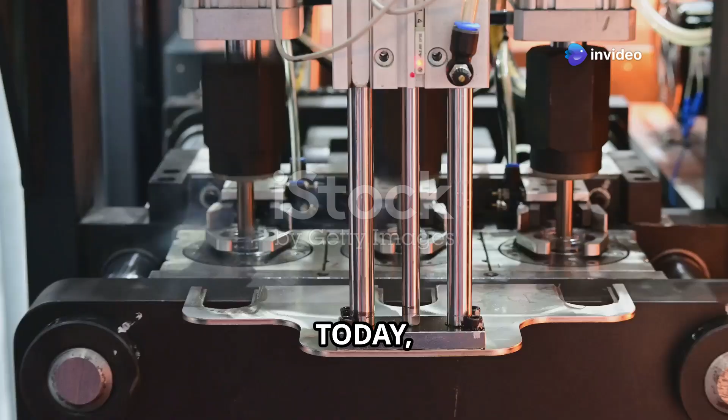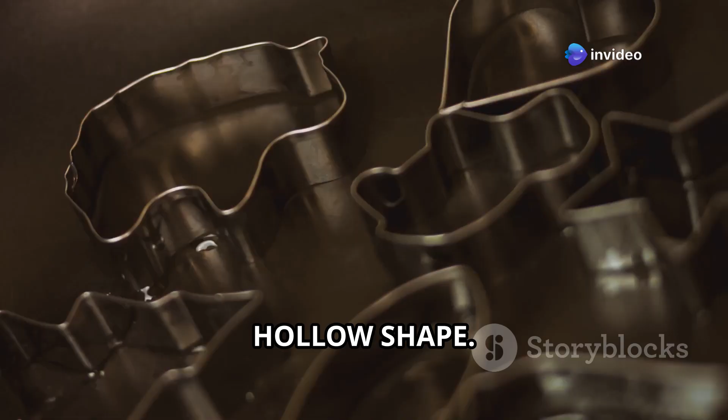So what is a plastic mold? Think of it like a very strong, hollow shape, like a cookie cutter but much stronger. Hot, melted plastic goes inside, cools down and ta-da, a new plastic thing is born.

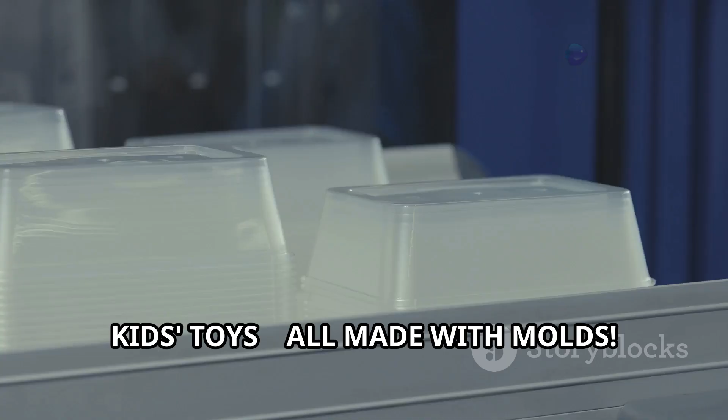Look around you. Your phone case, water bottle, kids' toys, all made with molds. Without molds, life would be different. They help make things fast and cheap. In this chat, we will learn all about them.

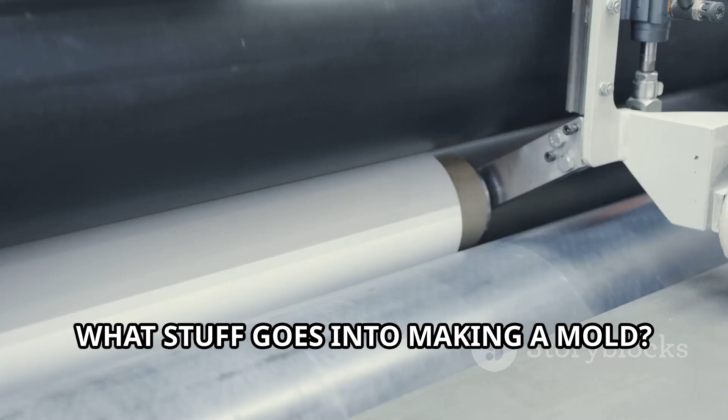How are these amazing molds made? What stuff goes into making a mold? It's a whole big process. From the first idea to the final part, we will see every single step. So grab your popcorn, sit back, and let's dive into the world of molds. It's going to be a fantastic show.

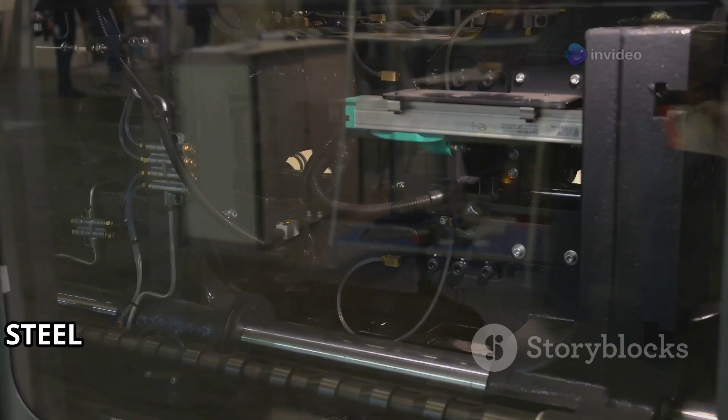Now Doston, what are molds made of? They need to be super strong to face hot plastic and lots of pressure. The most common hero is steel. Steel can take a lot of heat and high pressure, making millions of parts. It's like the Salman Khan of mold materials, always reliable and super strong.

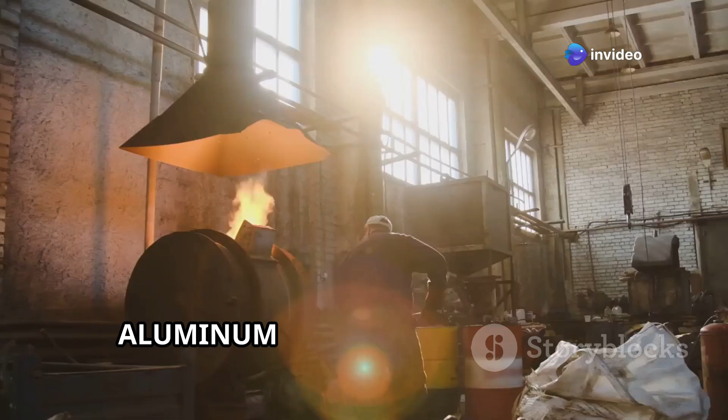But wait, there's another star. It's aluminum. Aluminum is lighter than steel, making the mold easier to handle and cool down faster. However, aluminum molds don't last as long and are good for fewer parts or trying out new designs.

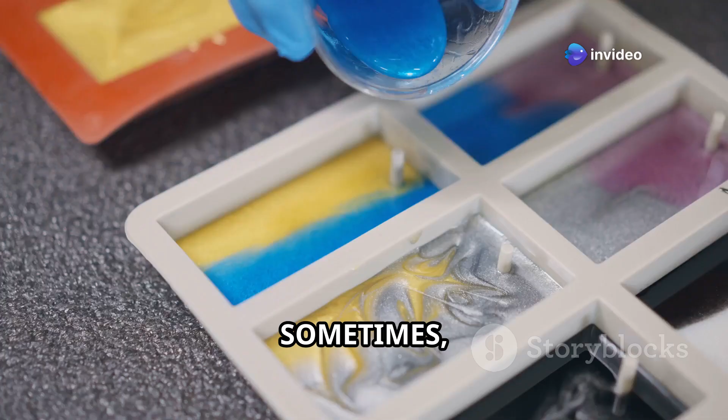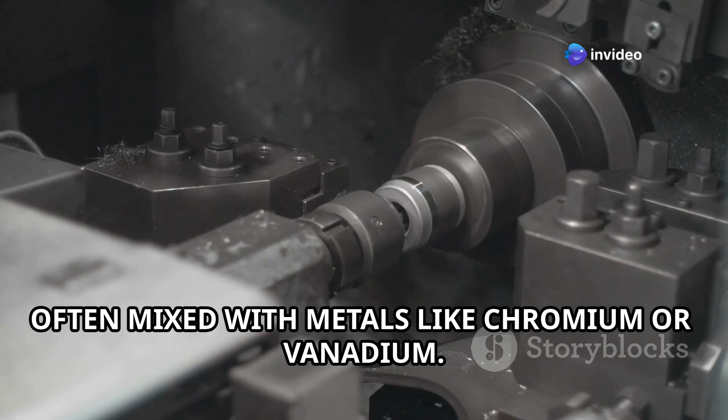Sometimes special materials are needed for tricky or tiny parts, or when the plastic is very aggressive. Engineers use special tool steels, even tougher than normal steel, often mixed with metals like chromium or vanadium. This makes them extra hard and resistant to wear and tear. Choosing the right material is super important.

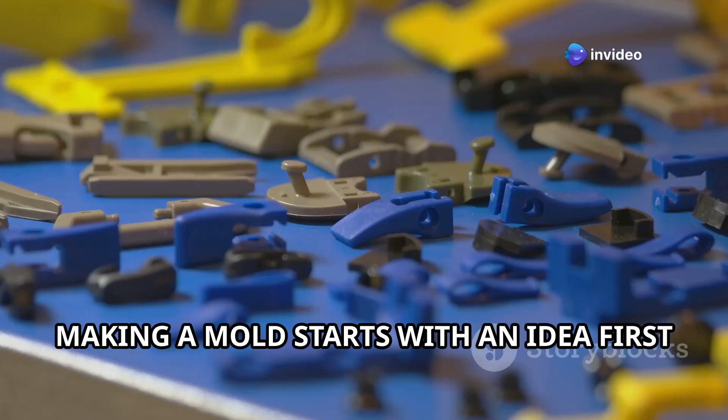Okay Doston, before we build anything, we need a plan, a super design. Making a mold starts with an idea. First, what plastic part do we want? The design of the part is step one.

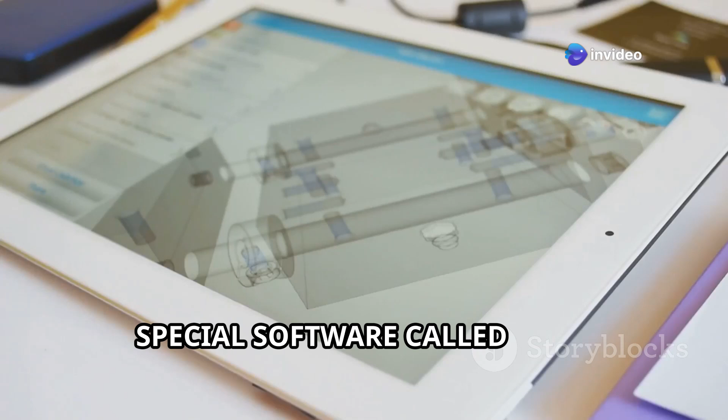Engineers think about every curve and detail. This is the blueprint for our mold. Then computers come to the rescue. Special software called CAD, computer-aided design. Engineers draw the mold on the computer like a three-dimensional digital drawing. They can see it from all angles and check all the measurements.

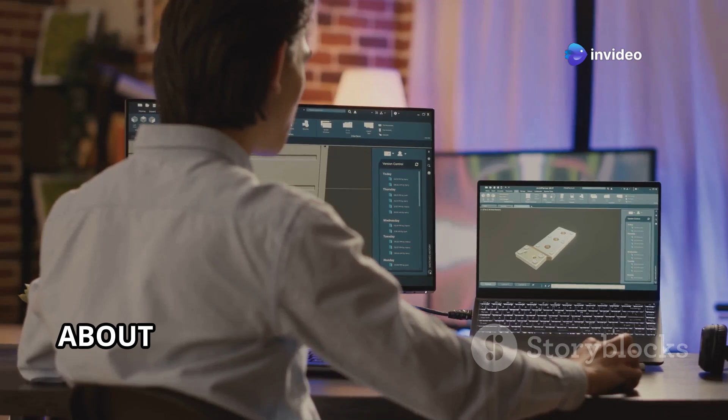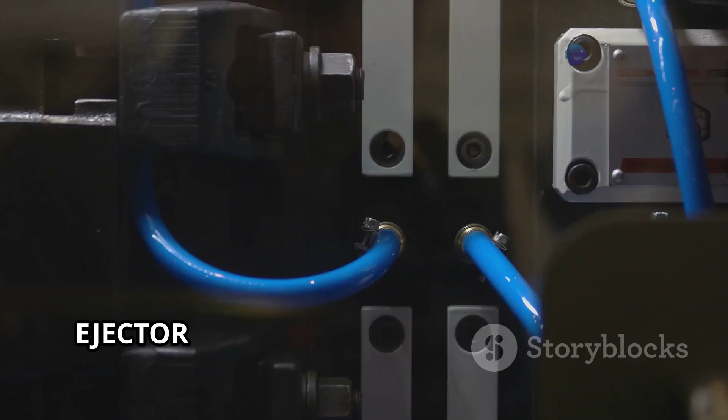The designers also think about how the hot plastic will flow in, called the runner, and the entry point, the gate. They also need cooling channels for water to flow through and cool the mold. And what about getting the part out? Ejector pins push the part out gently.

Precision is the name of the game, Doston. Every tiny detail in the design matters. If the design is even a little bit off, the final plastic part will be wrong. Designers check and double-check everything. The design is the treasure map, leading to a perfect plastic part.

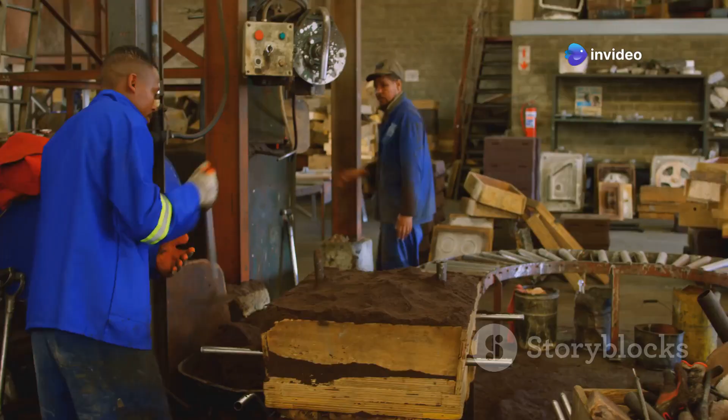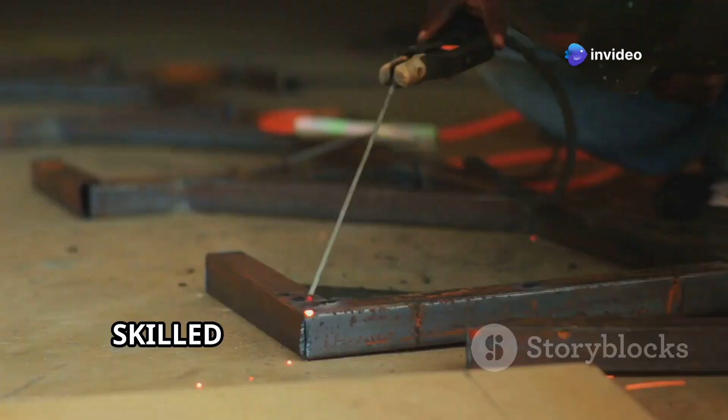Section 4: Building the mold. Real workshop magic. The design is ready. Now it's time for some action. We take the computer design to the workshop. Skilled toolmakers get to work, turning blocks of metal into molds.

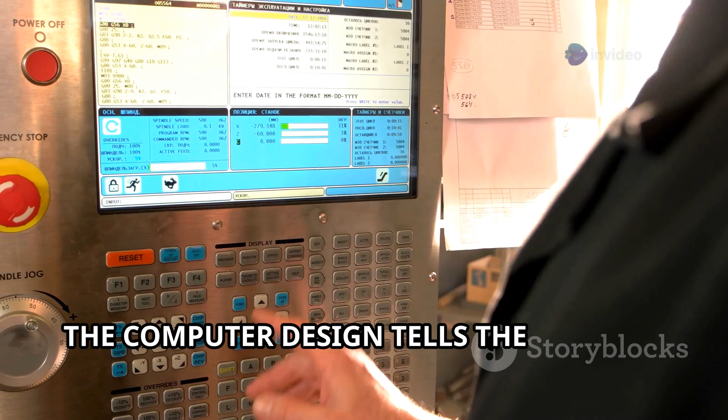First up, big machines called CNC machines. CNC means computer numerical control. The computer design tells the machine what to do. The machine has sharp cutting tools. It carefully cuts away metal from the block. Bit by bit, the shape of the mold appears. This process is very accurate, making sure the mold is just right.

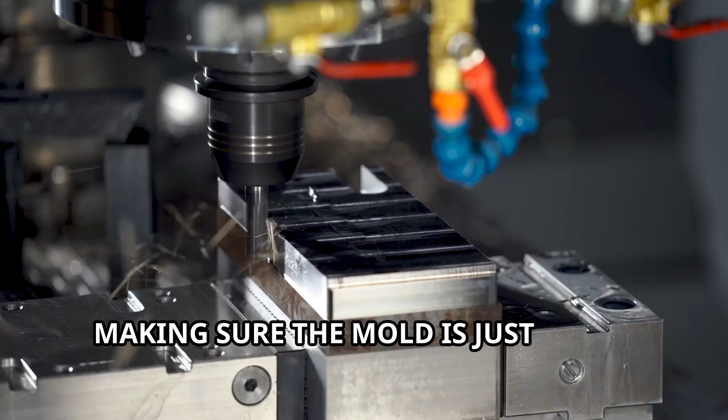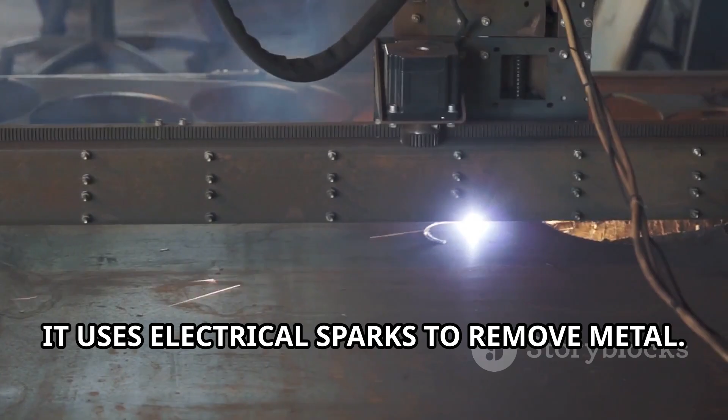Sometimes for very fine details or hard-to-reach areas, another cool process is used. It's called EDM, electrical discharge machining. It uses electrical sparks to remove metal. An electrode, shaped like the detail needed, is used.

The sparks jump from the electrode to the metal. Slowly, they erode the metal away, creating tiny, perfect shapes.

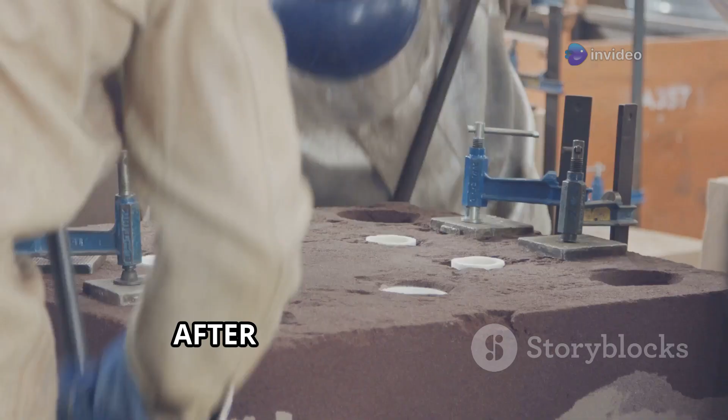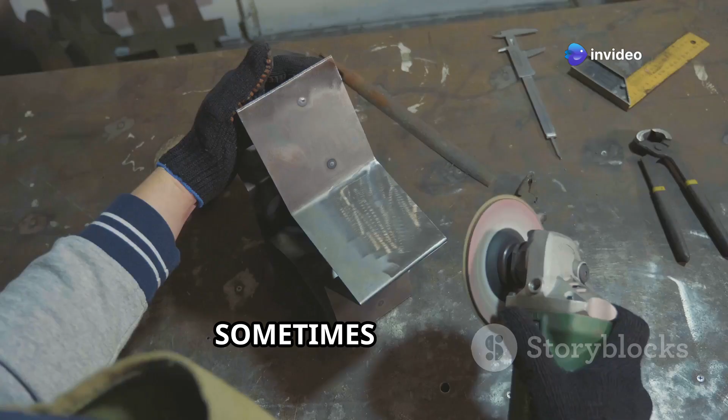After all the machining comes finishing. The mold surfaces need to be super smooth. If the mold is rough, the plastic part will be rough. So toolmakers polish the mold, sometimes by hand, with great care. They use special tools and pastes until it shines like a mirror. This ensures the plastic parts look great and come out of the mold easily.

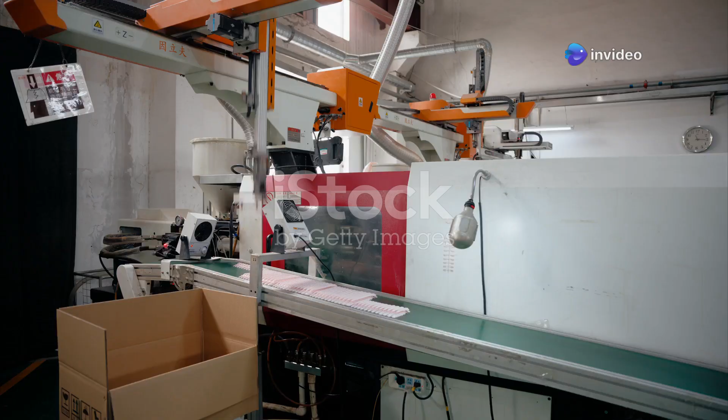Section 5. Poof, making plastic things. The molding magic show. Doston, the magnificent mold is ready. Now for the real magic trick, making actual plastic parts.

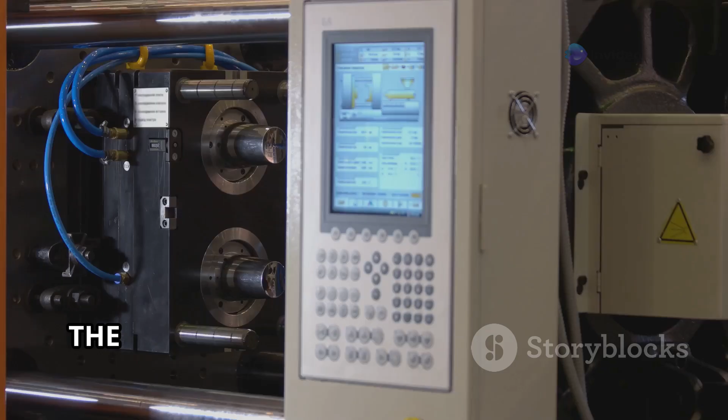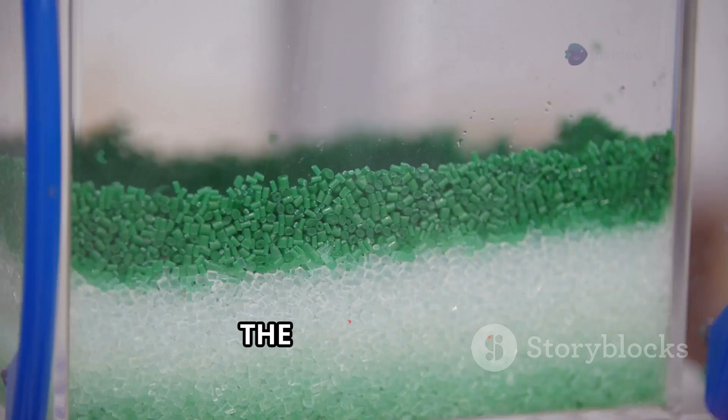The mold is placed inside the machine. Tiny plastic pellets are melted into a hot, gooey liquid. This liquid plastic is injected into the mold, filling every nook and cranny. Cool water flows through the mold, hardening the plastic. The mold opens, revealing a perfectly shaped plastic part. Ejector pins push it out. Pop! A new creation! It's like a magic show making hundreds of parts.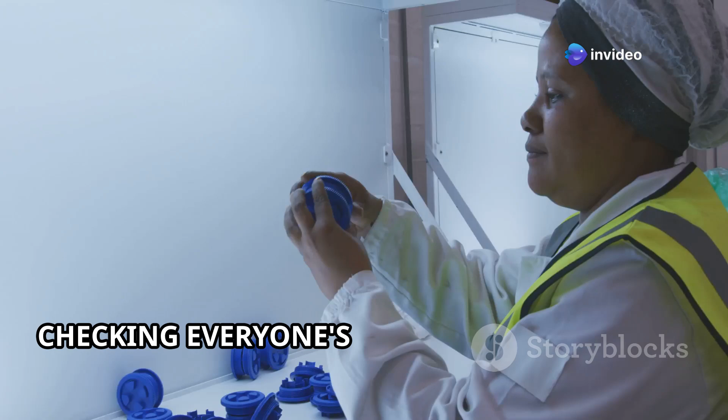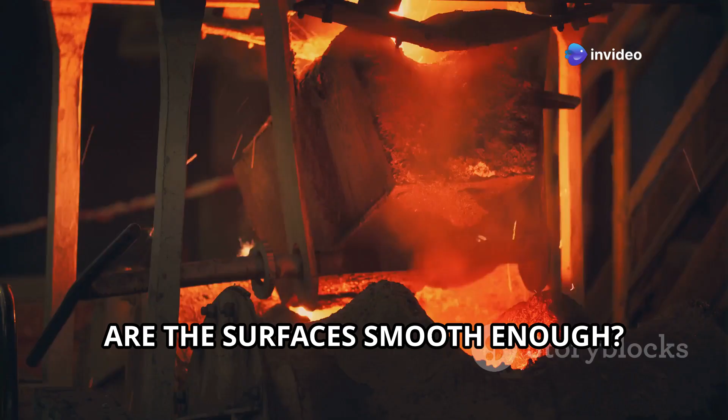First, the mold itself is checked. Toolmakers measure it very carefully. They use special instruments to check every dimension, every angle. Is it exactly like the design? Are the surfaces smooth enough? Are the cooling channels working? If there's any tiny issue, it's fixed. A perfect mold makes perfect parts.

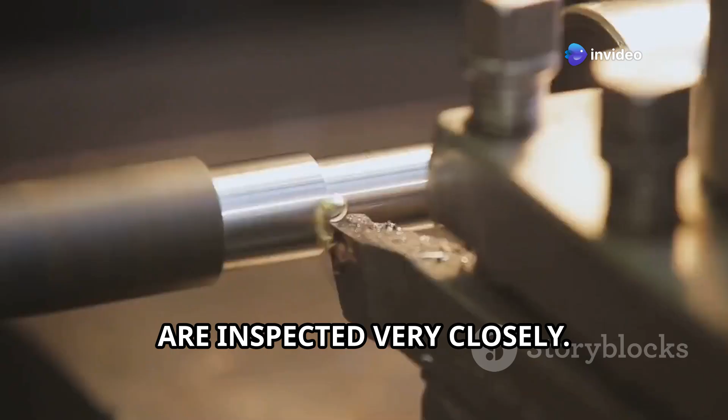Then the plastic parts are checked. The first few parts from the mold, called first shots, are inspected very closely. Do they have the right shape? Are they the right size? Is the color correct? Are there any marks or flaws? Every detail is examined by experts.

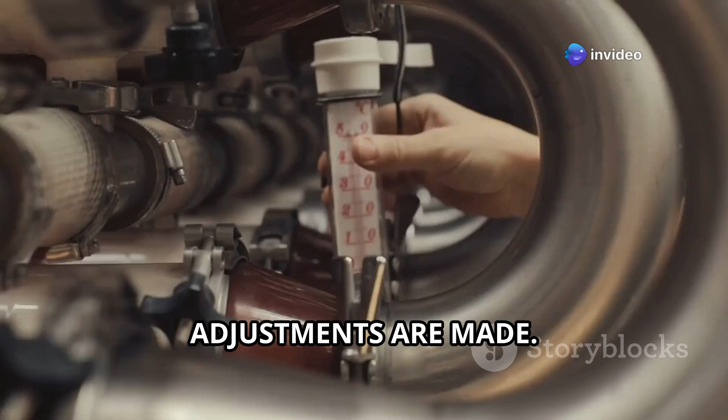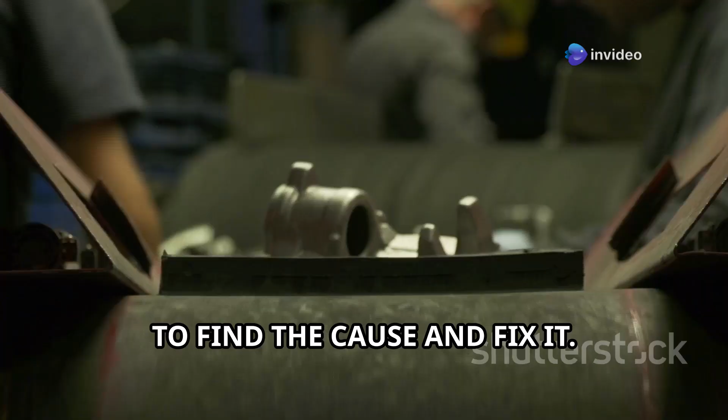If any problems are found, adjustments are made. Maybe the machine settings need to change, like the temperature of the plastic or the pressure of injection. Or maybe the mold needs a tiny tweak. The engineers and operators work together to find the cause and fix it, until the parts are absolutely perfect. Quality is not just a word, it's a promise.

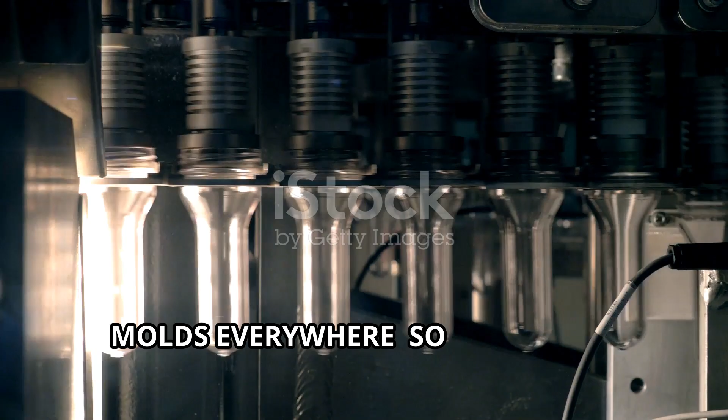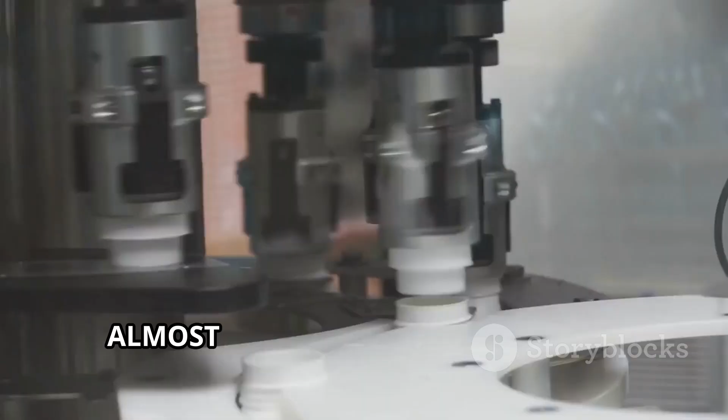Section 7. Molds, molds everywhere, so many uses. Doston, we've learned so much about how these fantastic molds are made and how they make plastic things. But where do we see these molds in action? The answer is everywhere. Almost every plastic item you see probably came from a mold. Think about your home, friends.

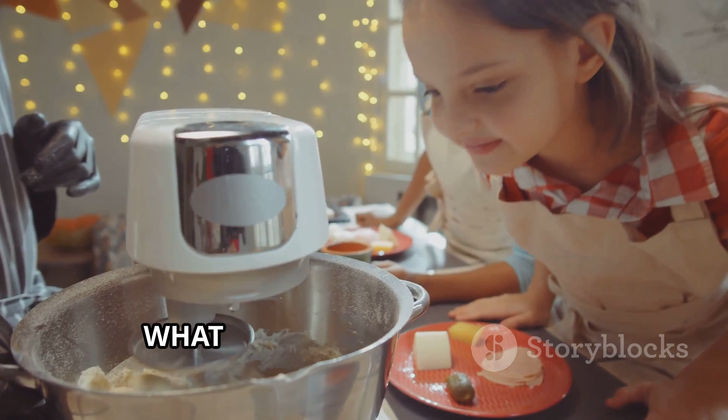In the kitchen, those food containers, molds. The colorful buckets and mugs, molds. The body of your mixer grinder, molds. What about children's toys? Building blocks, toy cars, dolls, all made with different clever molds. Even the buttons on your TV remote, or the casing of your fan. Molds are truly all around us.

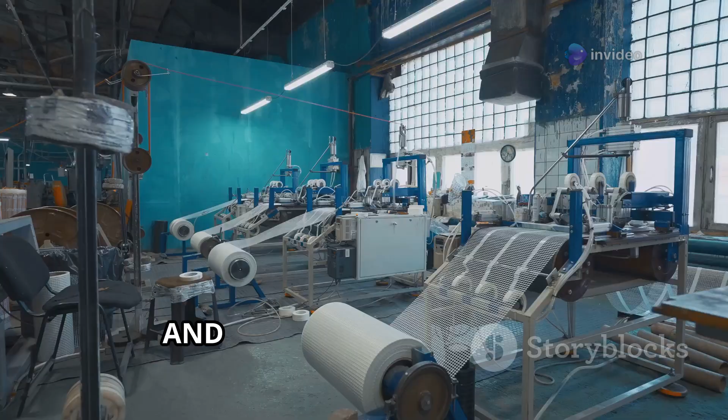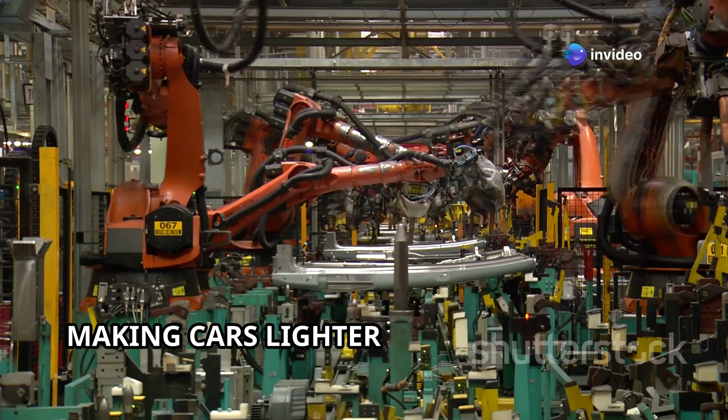And it's not just in homes. Industries use molds like crazy. The automotive industry for cars. Dashboards, bumpers, light covers, so many parts are made with molds, making cars lighter and more stylish. The medical field too uses molds, for syringes, medical device parts, even parts for life-saving equipment. Molds help make these precise items.

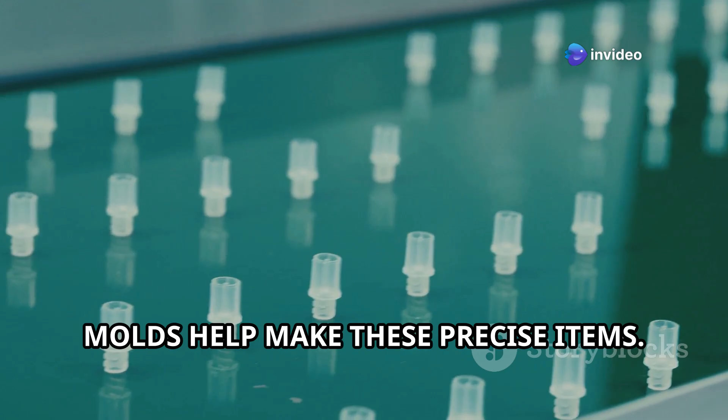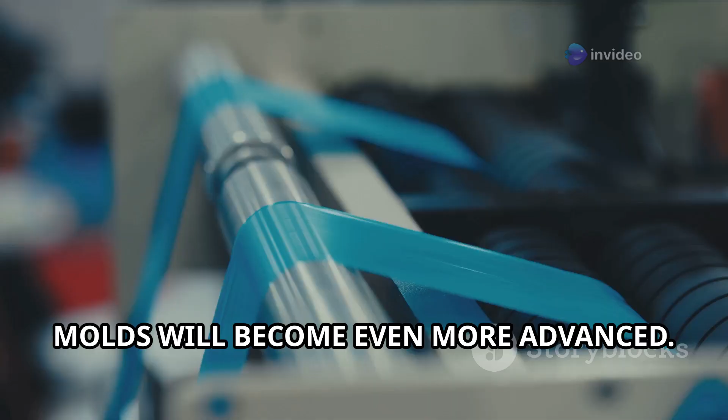So you see, plastic molds are amazing. They are the unsung heroes of manufacturing. From simple designs to complex shapes, they help create millions of products that we use every day. And as technology gets better, Doston, molds will become even more advanced, making even more wonderful things. So next time you see a plastic item, remember the incredible mold behind it. Thank you.